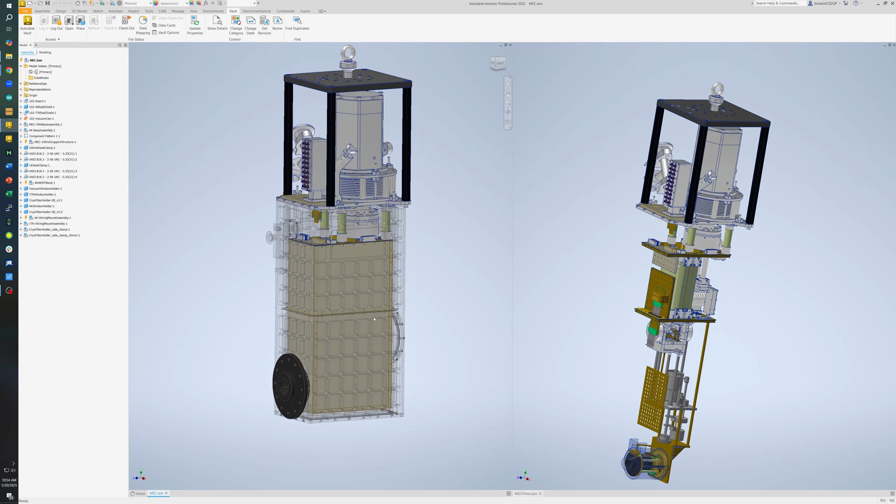So that starts here. On the left panel, we have the MEC instrument as it was in Hawaii. This is a CAD model that includes a lot of the major parts of the cryostat. Let's take a look inside. First, we can make this outer radiation shield go away.

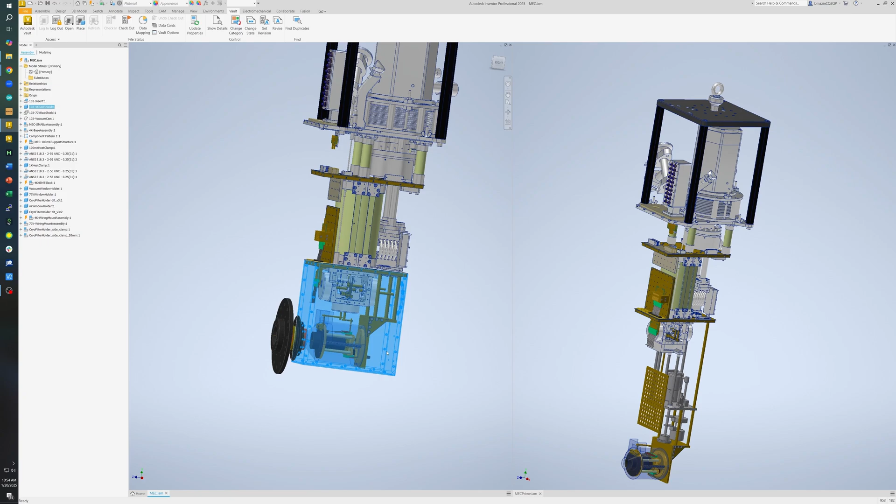Now we're looking at the 77K radiation shield. We can take that visibility off, and now we're looking at the 4K shield right down here. We can make that go away too. Now we're looking at the fridge naked.

The pulse tube gets us to 4 Kelvin. Inside this, there's a big 4 Tesla magnet. And this complicated structure is an adiabatic demagnetization refrigerator. This is the system that gets us down to 100 millikelvin or below.

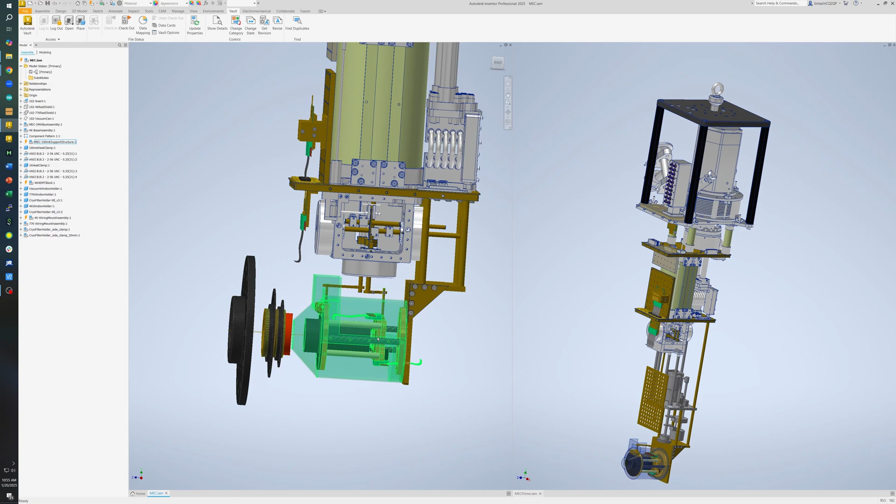Down at the bottom here, this is our device suspension. The light comes in through these windows, and then the device sits in the back of this area. The blue transparent thing is a magnetic shield that keeps magnetic fields out.

So this is what our original instrument looked like. On the right here, we've got MEC Prime. I'll try to put them next to each other so you can see what we're doing.

Basically, for MEC Prime, we're adding these parametric amplifiers. They're quantum limited amplifiers with noise temperature basically as good as quantum mechanics allows. And to make this work, we actually have to add a lot of space to the fridge.

So what we're actually doing is adding about 12 inches vertically to the fridge. In that, we're going to add this Simon Chase GL7 sorption cooler. This uses helium-3, which gets scooped out of the center of nuclear bombs and then recycled for physics here. That allows us to cool down to 300 millikelvin, and it has a lot of cooling power.

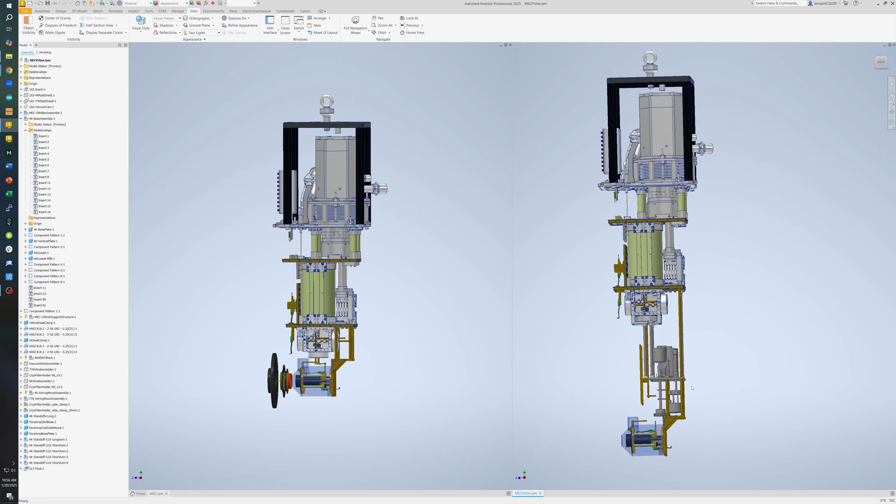So we're going to put our parametric amplifiers down on this metal plate right here. They're going to attach to that. And then this GL7 will fit in and cool all the amplifiers.

So to do this, we're adding about 12 inches to this setup here, about 30 centimeters. The way we're doing it is we're just going to add these new supports. You can see these support lines here, like this bar and this one. And then everything will essentially just drop down about 12 inches.

And we got another shield extension from the manufacturer that will allow us to just add another shield. So the fridge is going to get taller, but the first thing we have to do to make that happen is we've got to make these extensions.

So I had our machine shop make up this simple copper rod, and also I had him make up a bunch of these little end caps. You can see these little end caps right here.

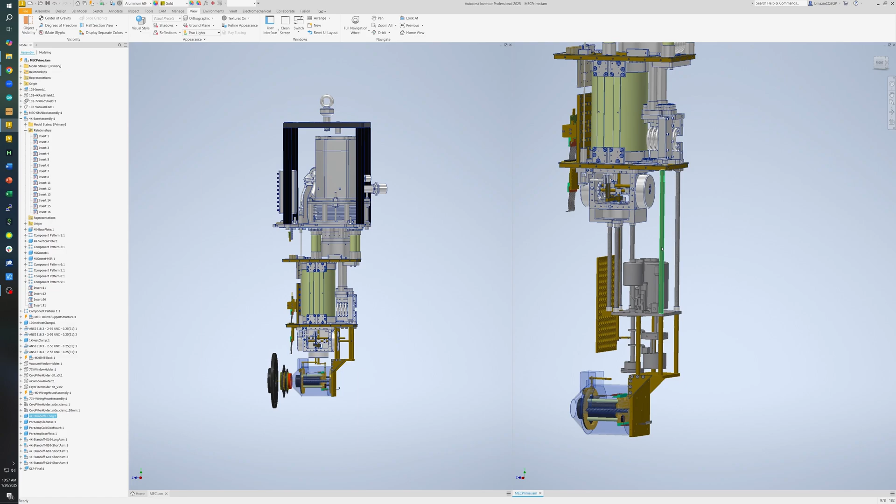What I'm going to do today is I'm going to build a jig that lets me glue up these parts you're seeing right here. These parts we're going to make out of G10, so basically fiberglass that's designed for cryogenic applications.

Then we're going to glue them in place, but to make sure the ends are perfectly flat and at perfectly the right length, I'm going to first machine some jigs so that I can glue them in place in one go. We're using fiberglass because it's light, it's strong, and it has very low thermal conductivity. That's the thing you really want.

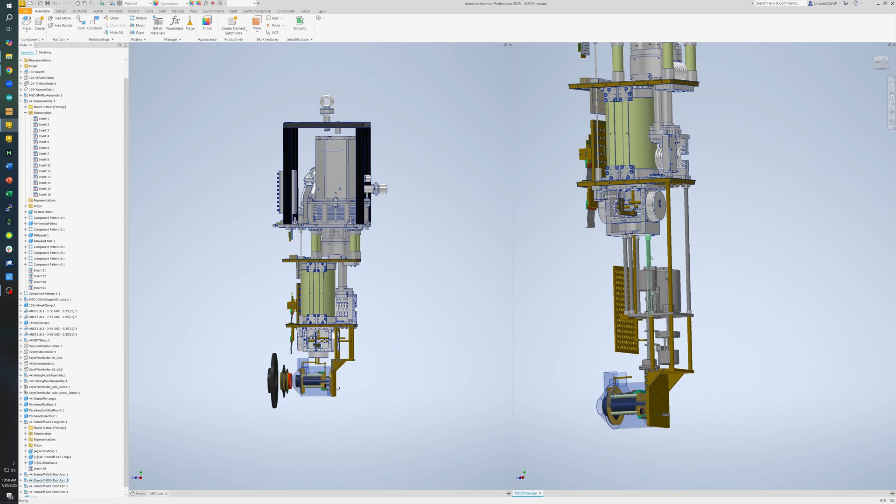In this case, you see we have a copper rod. That's going to take all the heat. But the more copper you have, the longer it takes to cool down because you have more thermal mass, more thermal inertia at low temperature. So you want to minimize that. So we've got one copper rod, and then the other supports are going to be made out of this G10 that is an extremely good thermal insulator.

All right, so now we go and make the jig. There's a little, it's off by the tiniest little bit. Probably because the dimensions aren't exactly right, but there we go.

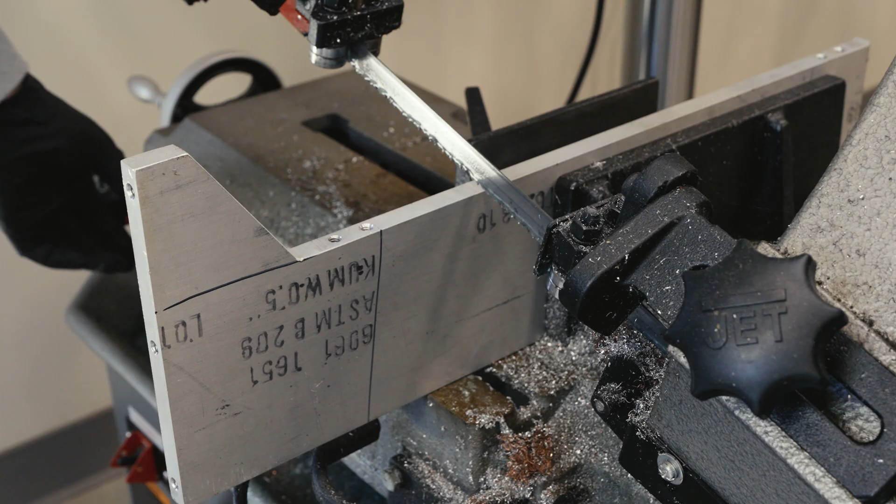Got it. Now we need to machine this thing. Okay, got our stock now, so now we can go set up the CAM for the machine.

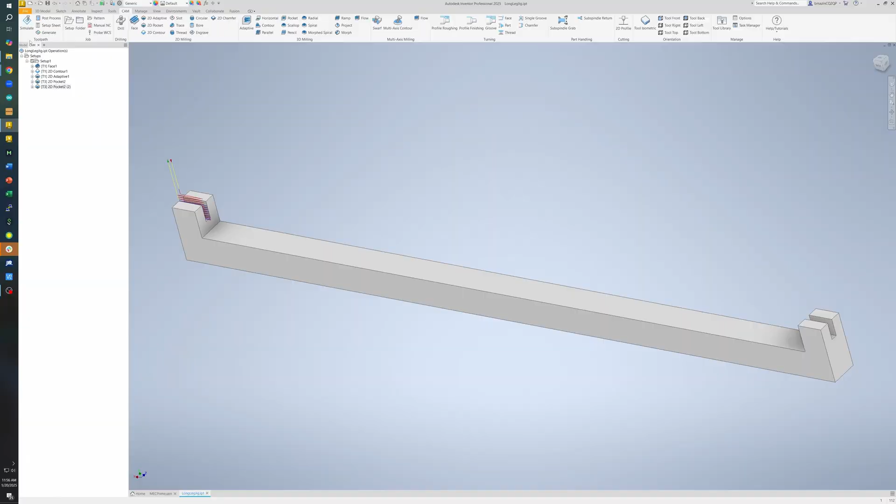All right, so now we have a complete setup. Let's do the simulation one last time. This is going to take a total of 15 minutes for the total machining time.

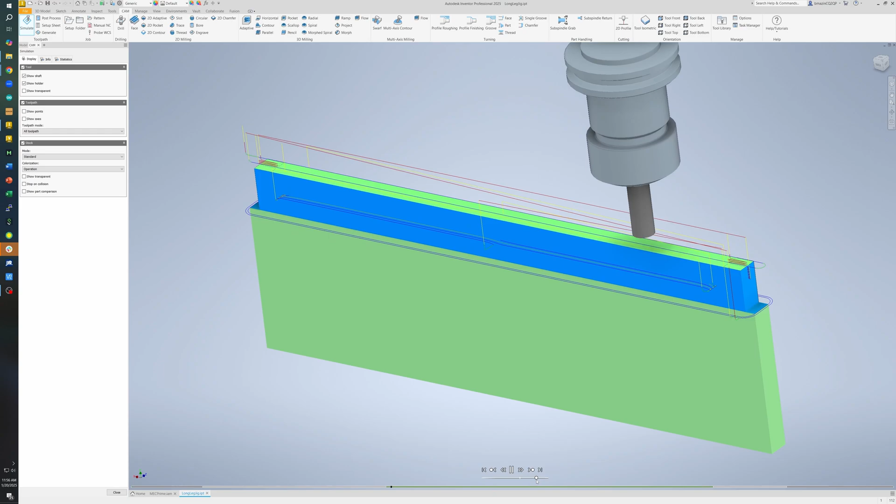Let's go through here. Cut off the top, do our pass, then our slot clearing. Our big slot gets rid of that, then we get that, and I think we'll have a usable jig. Okay, so now we're done here.

It's time to move to the machine. All right, now we're at the machine. Haven't used it in a little while, so we got to do a normal warm-up procedure on it.

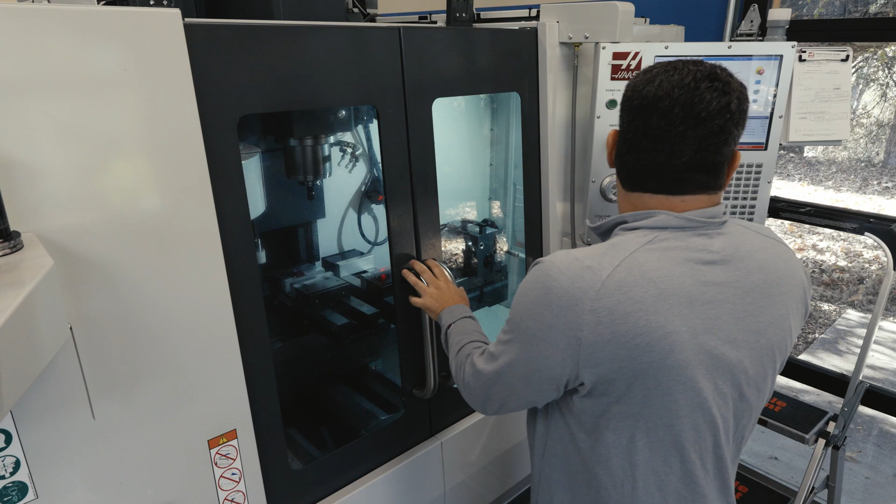All right, we're back, it's quite a bit later in the day. Turns out my coolant system needed work. I had to refill with distilled water, but I ran out. The distilled water shop was closed on MLK Day, so I got some from the grocery store. But then I went in there and looked, and everything was messed up.

When you're machining copper and aluminum at the same time, the copper chips are heavier I think. They settle out without going all the way through the chip auger, and since it's gummy you tend to take little chips, and those can get caught in the water system, where they corrode a little and form a bit of a plaque. So I had to clean all that out, refill with distilled water, and change the filter too, it's important.

All right, so we're ready to go. The next thing we have to do is machine our jig. So first we got to stick this into the machine and then get started. Let's do that now.

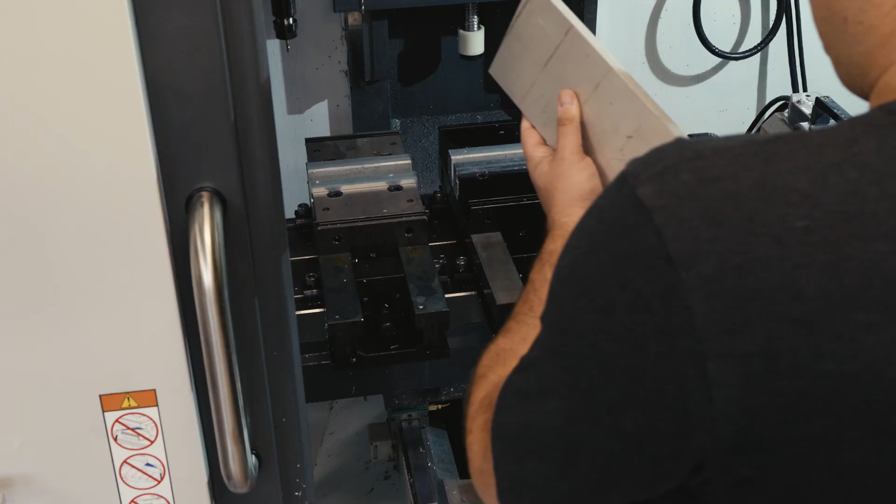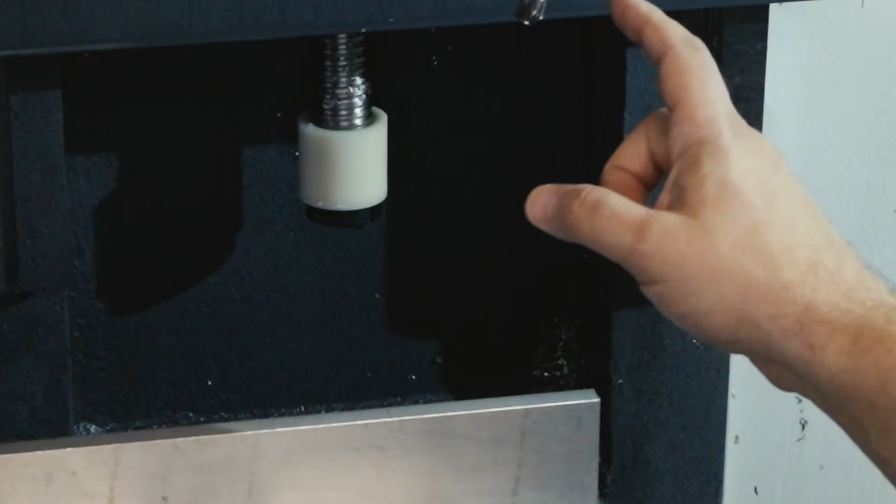All right, okay, so this has a couple holes in it that might get in the way, so I'm going to use this side and we'll stick it in now. All right, we've got tool one, our half inch end mill, and our eighth end mill in there. Everything looks good. Now we need to probe the location of the starting point.

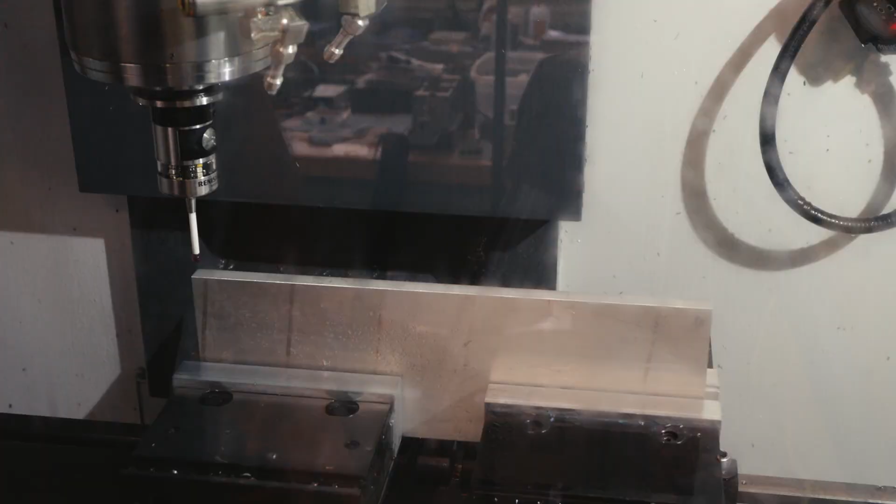Here's the probing operation. Z, X, all right, and we're ready to machine. For you professional machinists out there, remember I'm a physicist, not a machinist.

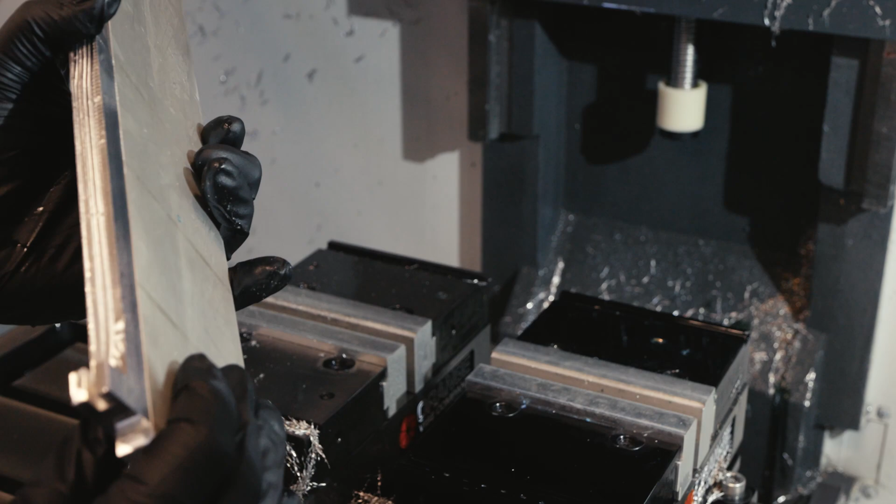All right, let's take a look. All right, I think our jig could use a little deburring, but it's ready to go.

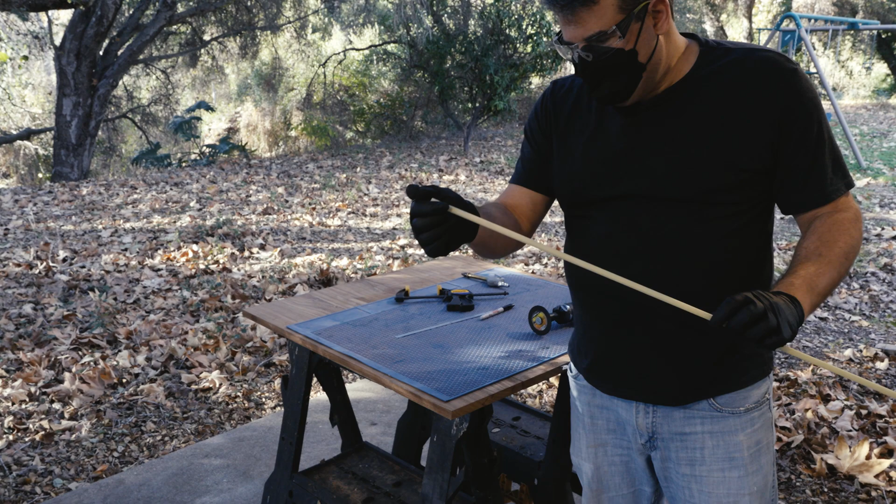All right, the next step is to cut this G10 rod. This rod is special cryogenic G10 that we ordered custom, 1/16 wall, 3/8 inch, so it has some flex to it. This stuff is nasty to breathe, so I'm gonna wear a mask.

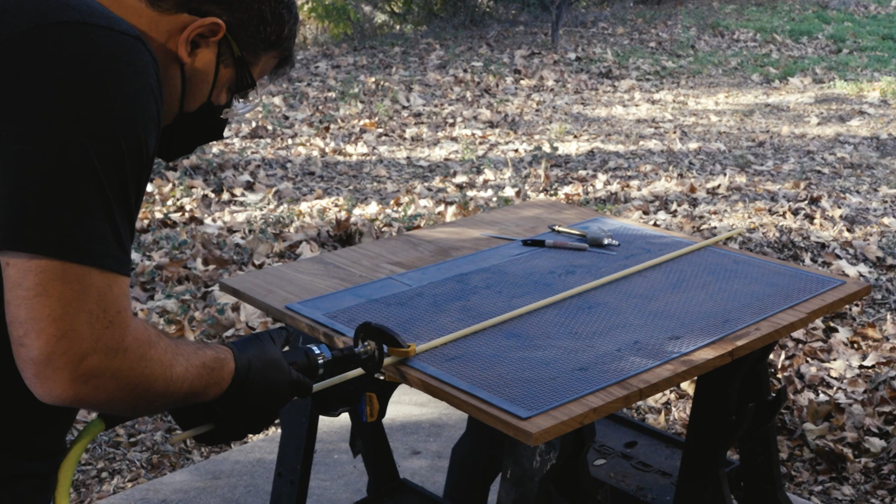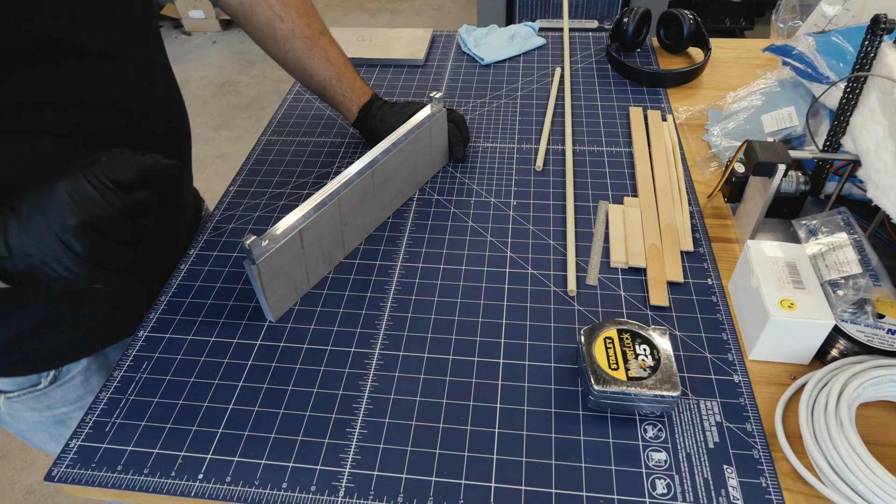All right, now that we got this we can set up the jig. Okay, let's do a test fit. So we've got these two pieces of end caps that we got from the shop. Notice if you can see, there's a tiny hole in the end, a vent. This is so that when we pump this down to vacuum, air can get out. You don't want to trap air in here or else it'll freeze and increase the thermal conductivity dramatically.

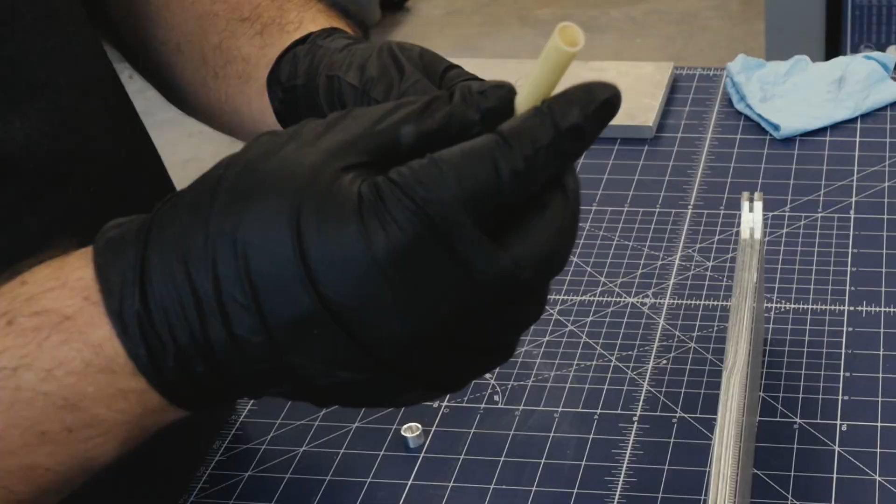All right, so that's what's supposed to happen, both ends are supposed to go in here. And whoa, someone cannot do math. So okay, now we've cut this to length. I actually went in, cut it a little long, and then touched it up on the belt sander. Now I'm gonna put these end caps on and the correct ball driver, and we should be in business.

Yeah, all right, I call that a good glue jig. Okay, so let's get ready for our glue up.

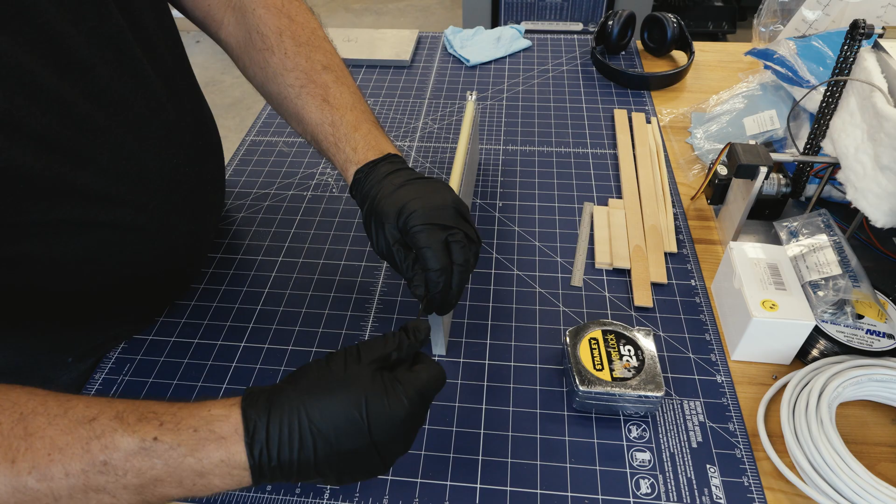Okay, got some nice glue on the outside there. I'm gonna get a little bit on the inside just to make sure that the glue doesn't all get pushed out. Inside covered, outside covered.

All right, got one. Now let's put it in. Looks like a solid connection. So now we'll just sit and let it dry overnight.

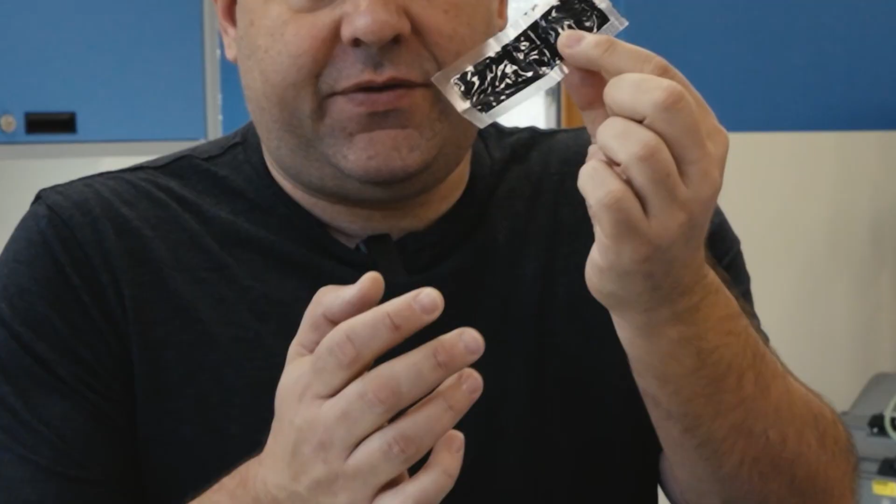All right, it's the next day, it's been about 18 hours. I left the packet as a witness sample to see if it's hard. It's pretty hard, probably not fully cured, but probably close enough. So now I'm gonna take the support out of the jig and we will see where we're at with it.

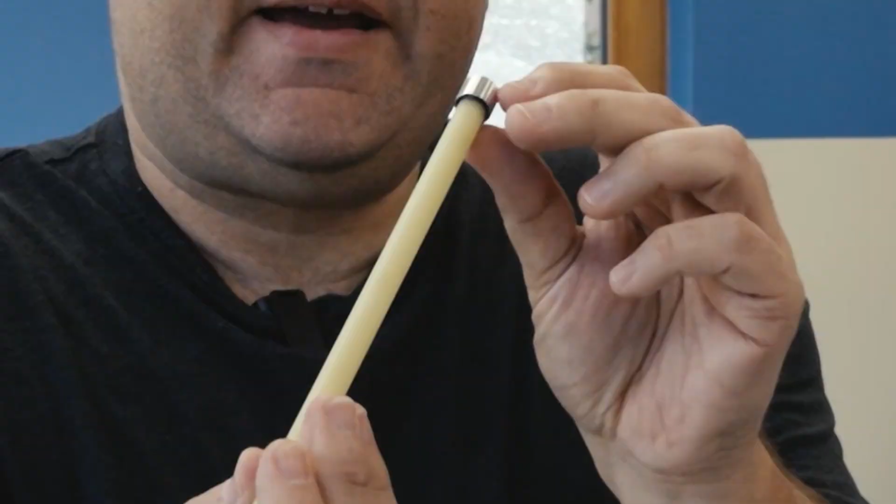All right, and there we have it. This leg looks real good, feels solid. I'm not gonna put pressure on it till it's had a little more time to cure because it's kind of cold out here in the shop, but that's ready to go.

So now I need to make 4 more of these, but that are slightly shorter for the design, and then we'll be ready to go.